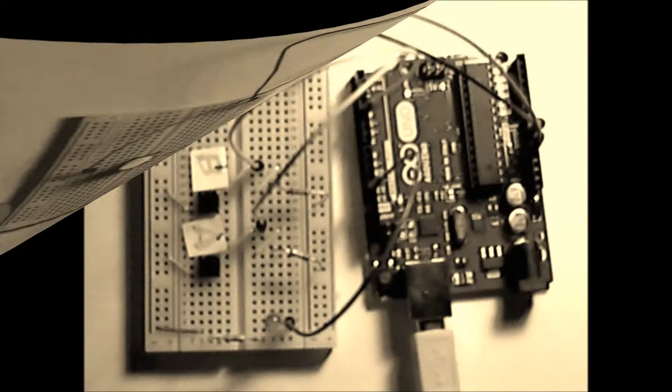I'm Jimena Grimes, and I am an Anne Arundel Community College student taking the Mechatronics Engineering certificate. Let me tell you about our Introduction to Robotics final project.

In this project, we have to design, assemble, test, and then it has to go through a track. So in this track, it has a line that the robot has to follow. Then it's going to encounter some cans. These cans have to be picked up by the robot, and the arm flips to the back where there's a basket, and this basket is going to collect all these cans.

So let me introduce you to my robot and my project. His name is Triton.

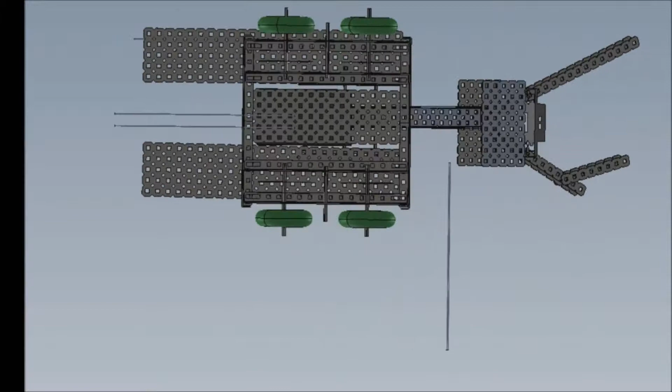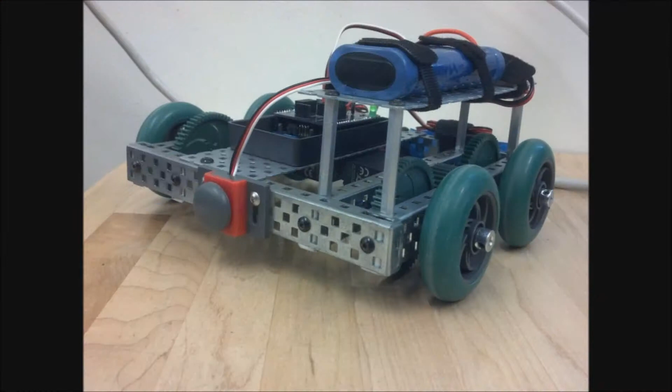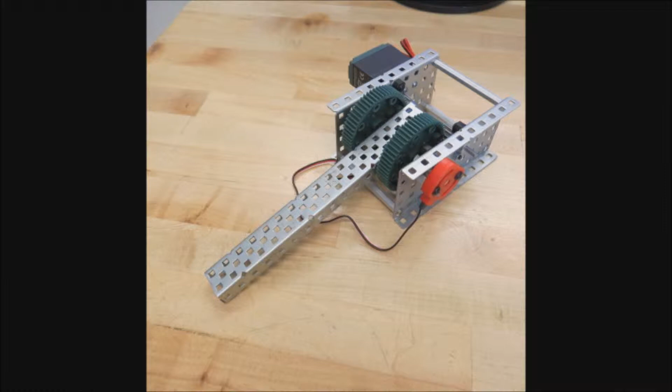Now let's move into the assembly part of the robot. First, I decided to keep this square bot from previous projects since it worked great and it would give me more time to work on the rest of the robot. The arm gearbox did not take long to assemble since the design was already provided to us. Next was assembling the claw that I designed.

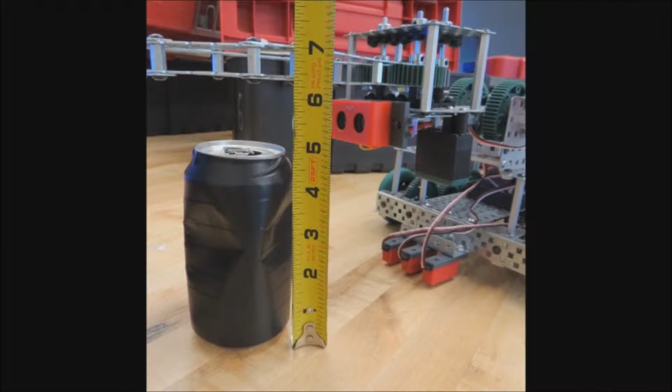And here you go. My robot almost finished, enough to test some of the programming. Then I realized that the box with the claw was just a little too high and it would not be able to find or grab the cans. So I moved the base of the claw lower and it still was not enough to grab the can.

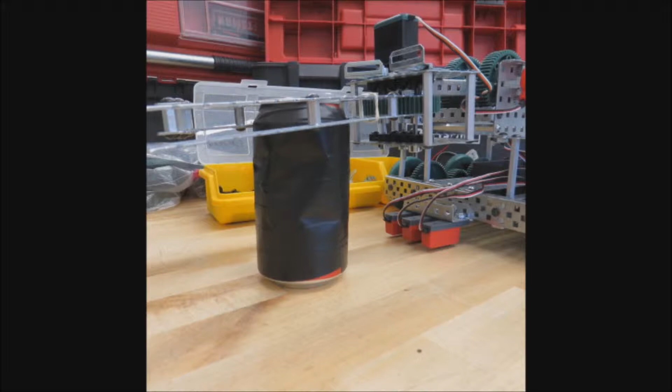As you can see here, the claw now was too low and even the arm gear would not be able to keep it higher. So I placed the brace in front of the gears to keep the claw in the right place.

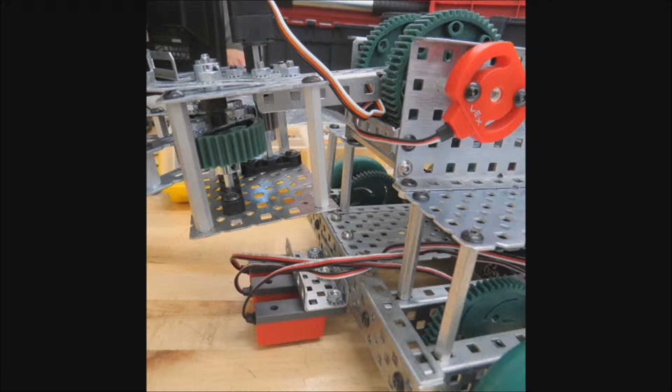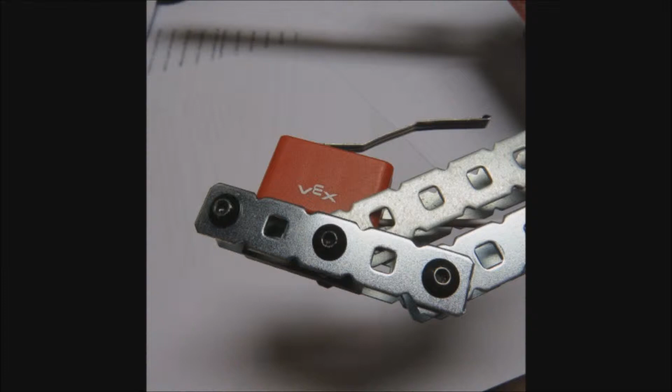We're making progress. After some testing, the claw was crushing the cans, so I changed the servo motor with a DC motor and placed limit switches. One in the section where the can would be picked up, that has to be moved twice, and then the other one to prevent the claw from opening too much and hitting the metal standoffs on the sides.

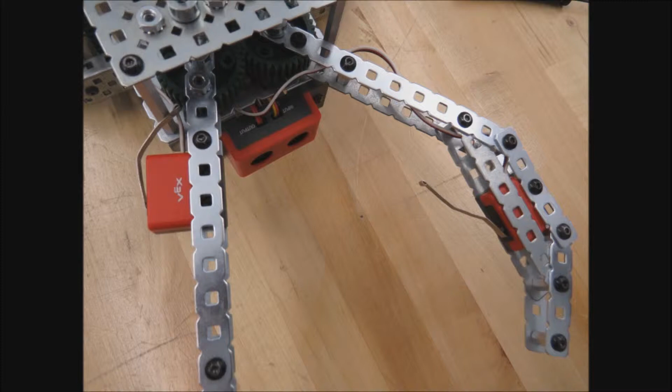Everything seems to be in place, but there's wires everywhere. Moved the Arduino box from underneath to the side for easier access, and with some patience and lots of help from Velcro ties and tape, it is more manageable and tidy.

Just one more detail. The basket. Yes, it is a wicker basket. My motto for the entire project was to go light since it is a little car and it was already struggling with all the weight from the gearbox and the claw.

So here we have the program. I'm not going to go into big details about it other than what I did. My approach was to create functions for each action of the robot, since I had already tested the robot with many, what I call, mini programs, and those were working. There was no point in rewriting it.

And then by doing it in functions, I could just call them whenever I needed them, and that made the program, or the void loop part of it, much shorter.